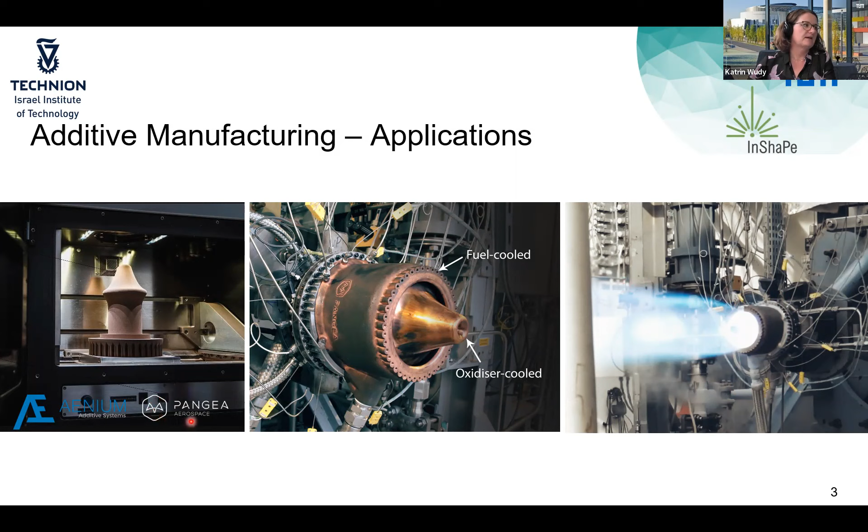And what you can see on the right-hand side very nicely is that there were also some hot tests of this rocket system at the company Pangea. So this is one use case partner. We have several use case partners for several application fields, in automotive, for example, or aerospace applications, or in the field of energy. But the idea is, okay, there are already applications, but there are challenges, huge challenges.

And I would like now to focus on the process. So what are the process steps and what are the challenges in laser-based additive manufacturing, or rather powder bed fusion of metals using laser beam? On this slide, if you don't know the process and are not familiar with it, I just describe it shortly. So powder bed fusion, I mentioned it, is one additive manufacturing technology where you have a powder bed. This is schematically shown here.

The size of these powder particles is really small, around 50 microns, so the thickness of one of your hairs. And you have an energy source. The energy source here would be a laser system. It's a movable energy source with a scanning system, which is schematically shown here. And what is happening? The first step in powder bed fusion is that you need to apply a powder layer, and this is the powder coating step.

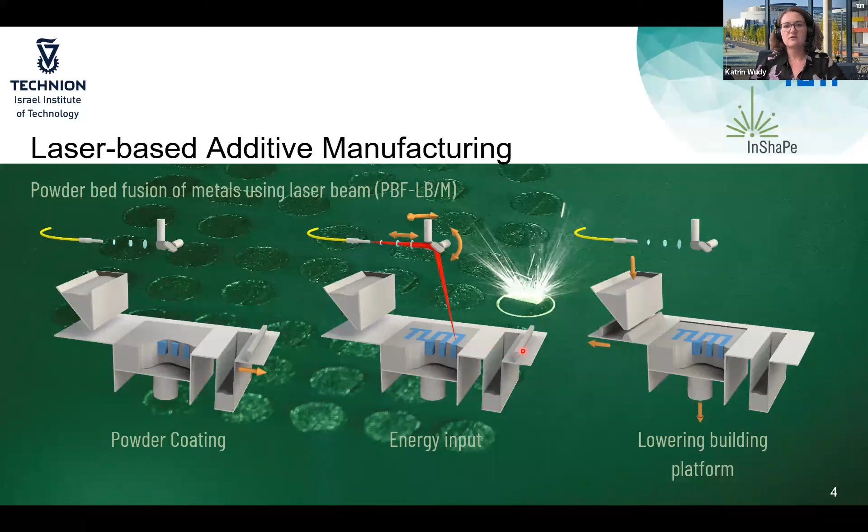And afterwards, you need to fuse this powder layer with the energy input, and the energy input in our case is given here by an IR laser which melts the metallic powder material, and you generate a melt pool. So the project actually is focusing on this energy input step and how to tailor the energy input, but I will describe this later. And the last step is the lowering of the build platform, and then afterwards a new powder layer is applied, and all these process steps are repeated until our final component, which would be the TUM logo here, is created. So that's for those who are not familiar with the process.

Now, what is the challenge during processing? The challenge is that we have really high cooling rates. For metal materials, this always means that the cooling rates determine the microstructure formation at the end. And we have also, if we have a look on the space, high thermal gradients.

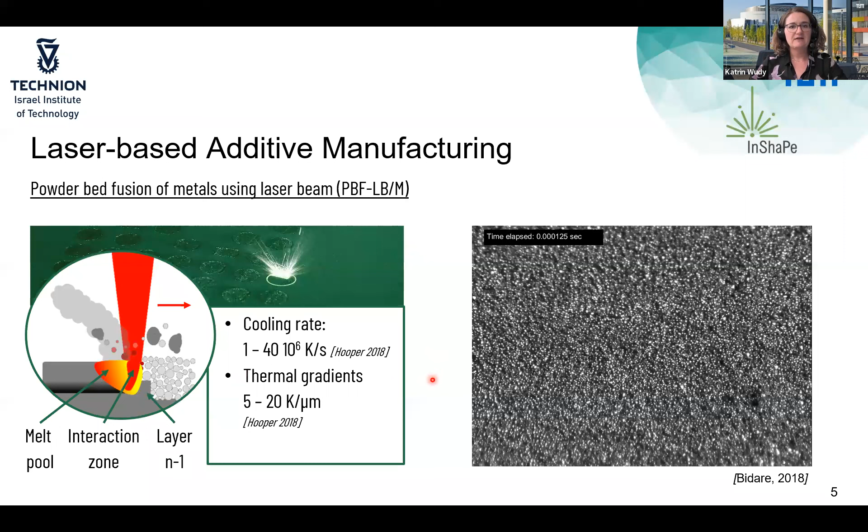And if we now have a look in detail on this process where the laser interacts with the powder bed, you see a highly dynamic process. So this is actually the laser beam, the bright spot here. And what you can see is this highly dynamic process. We have a lot of powder particles flying around, and these powder particles also sometimes interact with the laser beam and with other powder particles, and then you get some kind of agglomerates of the powder particles, and these would be, for example, scrap material later on.

Or sometimes it happens that these powder particles flying around land in the previously melted area, which is this one, and create defects in our components later on. So why is this such a highly dynamic process? That's the question. The question we would like to tackle is how to smoothen this process a little bit, maybe by tailoring the energy input in space, so by a spatial tailoring of the energy input. But first of all, the challenges.

So typically we use for energy input a Gaussian beam profile, which means the intensity distribution is like a Gaussian profile. And this leads to defects, component defects or process inhomogeneities like overheating of the melt, which was shown here, spatter and balling effects. I will describe later on what balling defects are. And the aim of our project is to tackle these key challenges.

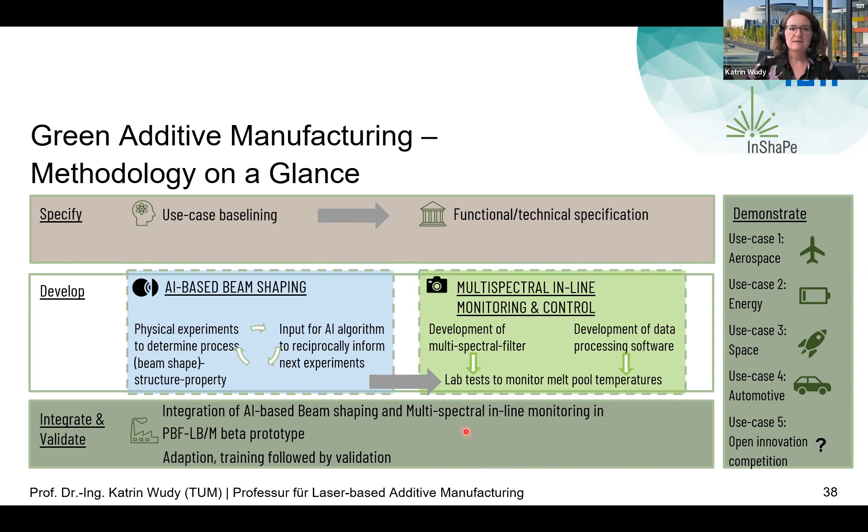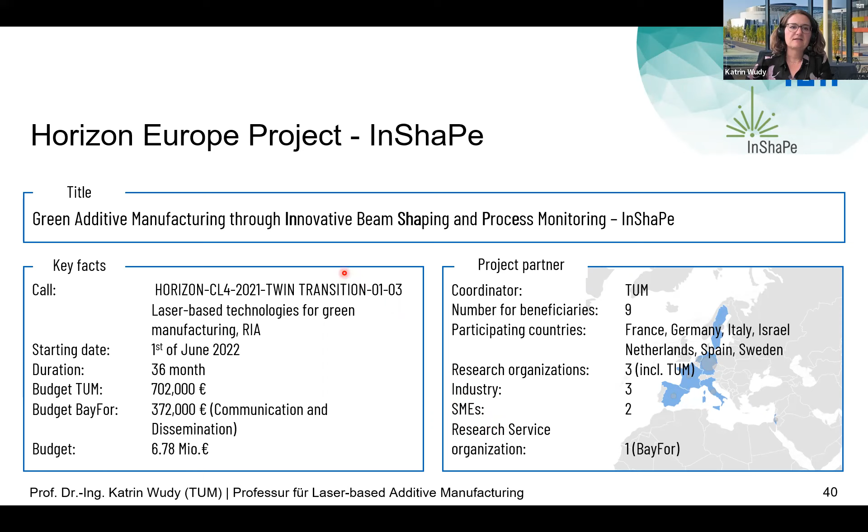Here you can see some key numbers at the end: all the countries involved in the project, 3 research organizations, and I think it's really nice that we have 2, actually 3, SMEs involved in the project. It was in the call of laser-based technologies for green manufacturing.

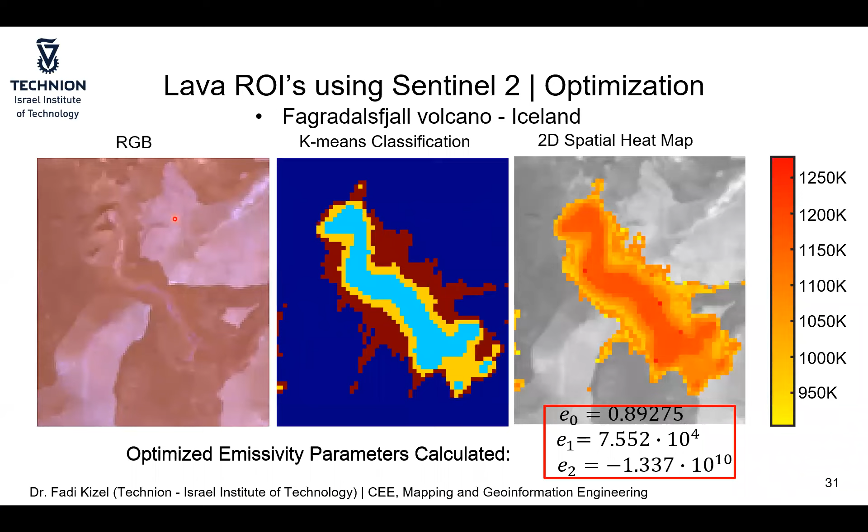So I was wondering, you have this printing with the Gaussian shape of the beam, and then you also have the microstructure when you use the ring shape. So I was wondering if this would be a good way to avoid the elongated grains that sometimes you get when you print along the building direction, because that can cause anisotropy in the samples, meaning you get different properties, for example tensile properties, in the build direction versus vertical or horizontal. Would this be a good way to avoid that, since you don't get elongated grains?

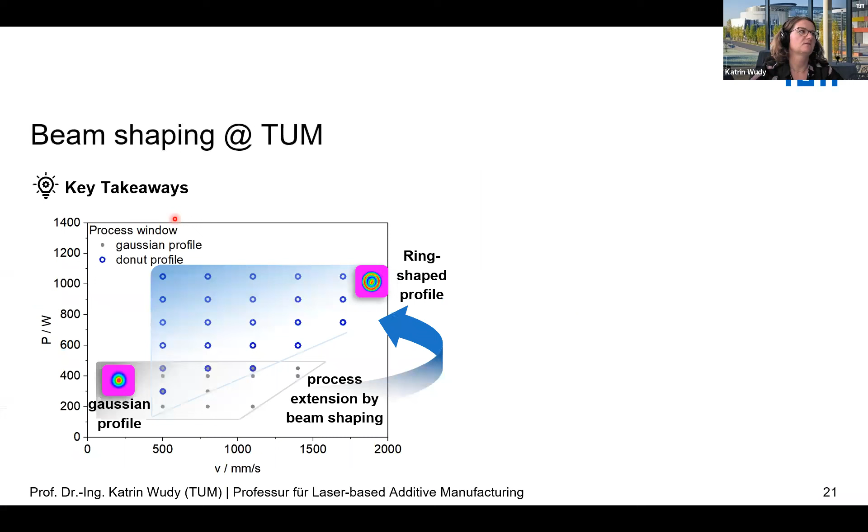Yeah, I think this is a question we have to tackle. This is actually something we would like to investigate in the future, but we haven't done it yet. At the moment, if you change the beam profile between 6 different beam profiles, you have to do parameter studies for all of them, it's a huge experimental effort, and that's why we haven't analyzed how the microstructure is actually changing.

But I think this could also be interesting for the project at the end. It gets more complex though, because with complex parts you don't have simple cubes anymore, so the microstructure at every spot will be totally different. But it could be possible, and within the project we also deal with nickel-based alloys, which tend to have grain growth in set directions. So this is something I think we will investigate in the project.

No, it's super interesting if one can control that. Thank you. This means, to explain a little bit, controlling some kind of voxel-based mechanical properties of our parts.

Thank you. Welcome. So, any additional questions? Maybe from someone who is not part of our project. Yeah, hello, so I will step up.

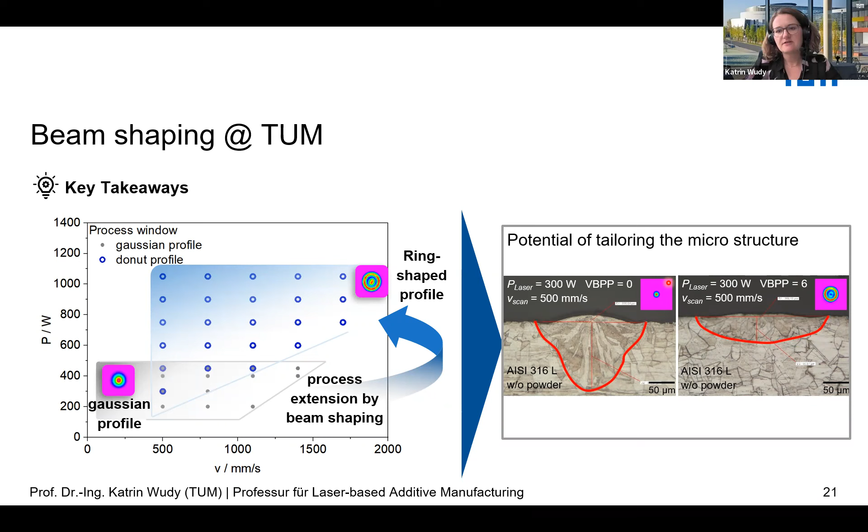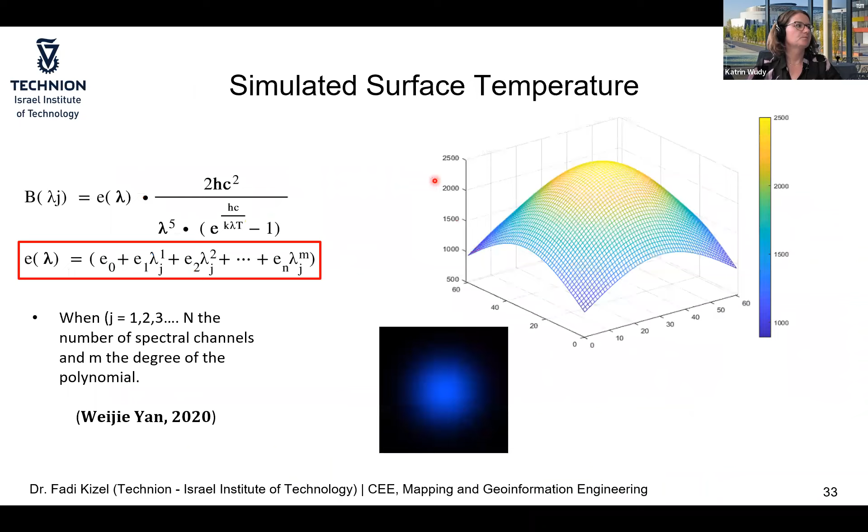Yeah, actually this is also a topic we would like to focus on. Maybe you've seen it on the last pictures, where we see these different, not rotationally symmetric, beam profiles. So the idea would also be, if you have really filigree elements, you separate the beam into 3 different beams with one spot actually. Then the topic of resolution and intensity distribution between the different beams, as you separate one beam, becomes important. This is something we would like to investigate.

And of course, the resolution also depends on the size of your beam profile at the end. But you can imagine we can also create some kind of lines, not the lines shown here, but lines at 90 degrees to the actual direction of printing. So it depends on the feature at the end.

You're welcome. Sorry, did you change the frequencies of this non-Gaussian shape, or is this a shape with some constant frequency? No, actually it's constant. Okay, thank you.